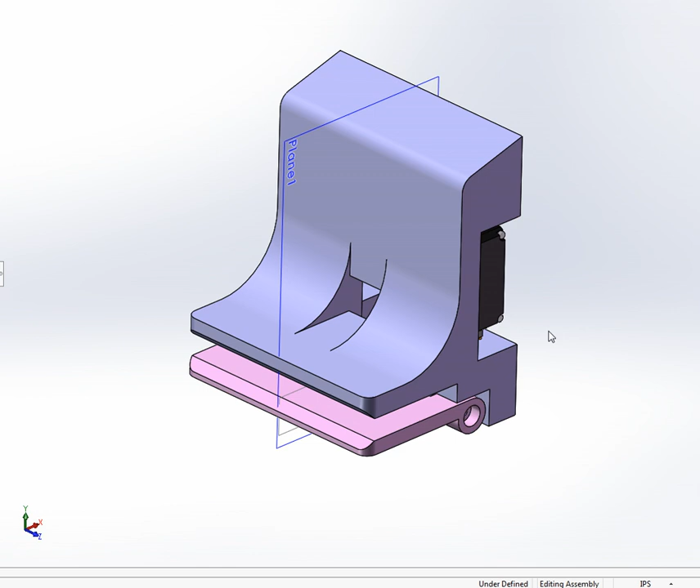This is the third video in this Lab 2 pre-lab, and so on Canvas there'll be a step file that you can download and then convert into SolidWorks parts. You'll have to, they only come through with shaded without edges, but that's just a visibility thing. And also the parts will not be constrained, so on this particular one I added some work planes that were right at the midpoint of some of these lines to keep everything lined up here, and then just did a concentric constraint there.

So on this one, you can see, let me just turn this back off, the work planes. So anyways, if this was at some angle, so let's see if this is like up at the roof at some angle, and so if the plate is in here, and you can see this is kind of nice because once you have it in position, then you can just drop this drawer a little bit and back up. You're not going to have to worry about knocking it off.

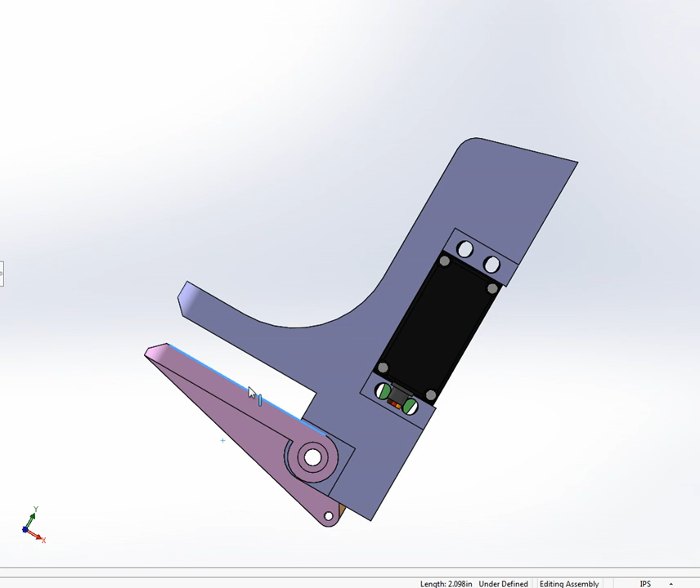And the same thing is as you move into position to pick one off, the plate will be hanging down like this. You can get in position and then just close the drawer, and then you'll be able to pick up the arm. So this is one idea that you can actually use this model if you want. Obviously, this is going to have to then be connected to some other fixture that will have the links connected to it. But you're free to try this if you want.

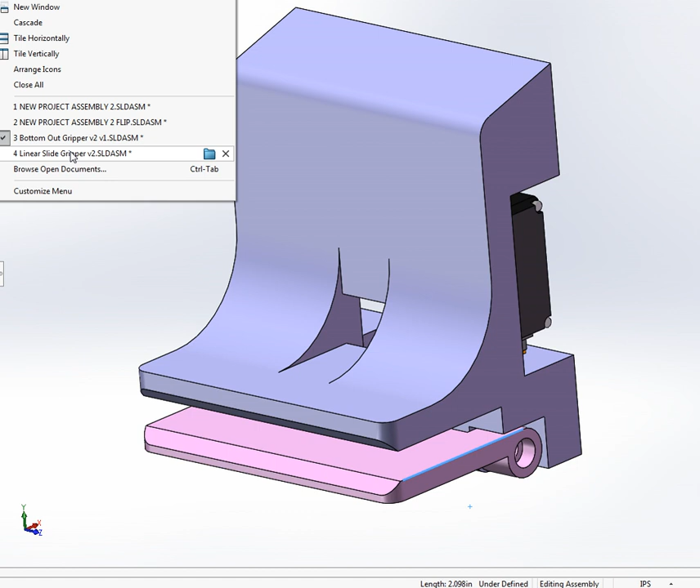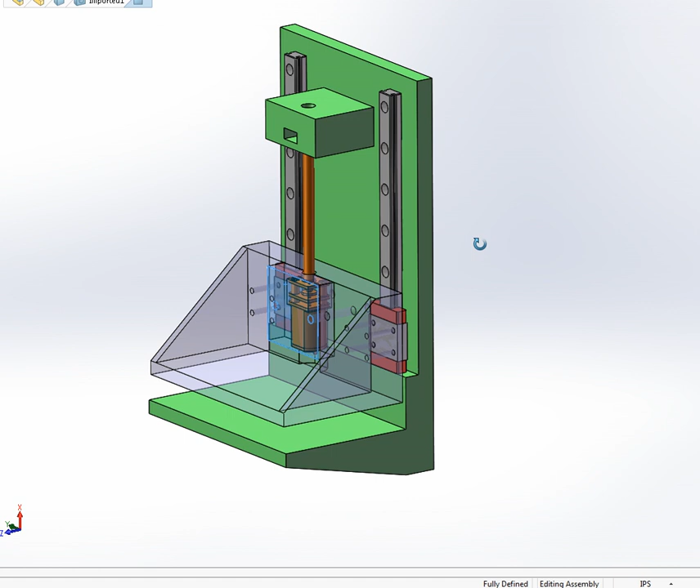And then another one, so this is one with a slide. You have these linear slides, and there's a Pololu motor in there, and so this is just another idea. You could also design this so that the top jaw was fixed and the bottom jaw went up and down, so that you wouldn't have that clearance issue, same as before. But these two grabbers will give you at least some idea to start thinking about.

So we've talked about the graphical linkage synthesis and how you can, if you know positions and orientations for three different positions, determine where the linkage pivot points need to be. And so in this particular case, if we were to move these so that this end was all under the same spot. Remember that we can move the robot back and forth, so we have that degree of freedom. But what I'm going to do is go to options here

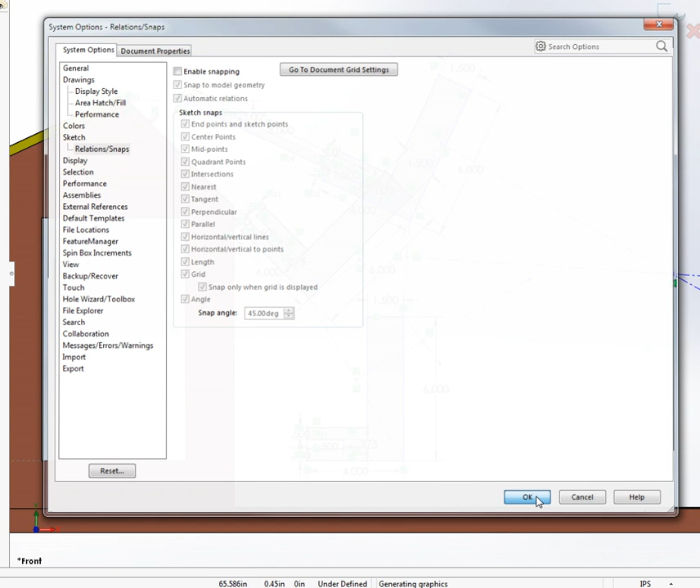and I already turned off the snapping, because when you move this sketch around, what you're looking at right here is just a sketch. So there's the field, here's the roof, and this is just a sketch on the XY plane of the assembly. So these aren't actual parts, it's just a sketch. And you'll notice that there's perpendiculars, because we have to be able to rotate. This one is at 25 degrees, which it would be if it was on the other side.

So in other words, I just want to try and do some linkage synthesis to figure out where the pivot point should be so that we can get to 0 degrees at 2 inches above the floor. And then this one, let me just turn on that collinear. So this sketch I just had is actually the one that's defined. So I can't move the sketch of the grabber right here; it's right on this collinear. So let me just shut that off again.

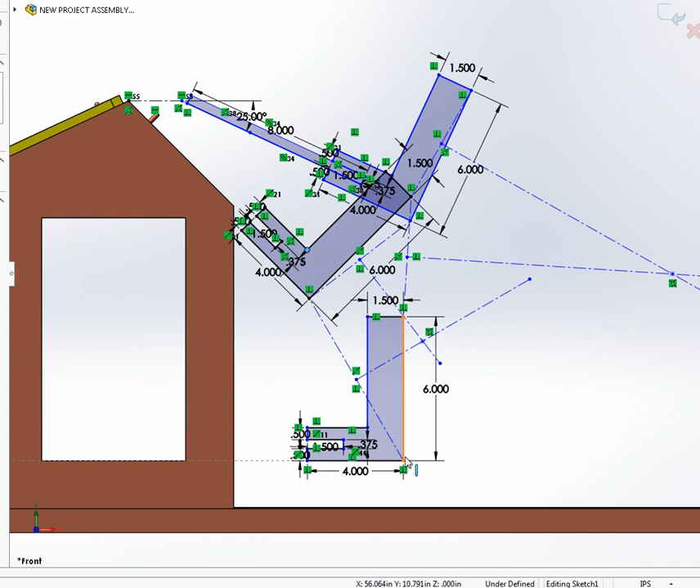But so this one, you can see if I try and drag it, it won't move. The other two are constrained. It has to be lined up with this edge here. So that's 2 inches, but I can move this one, right? I can move this back and forth here, and I'm going to have to stop here and pick up from the next video.